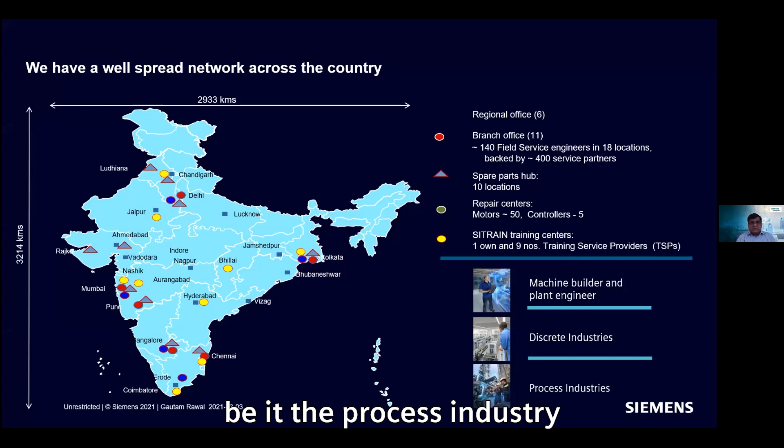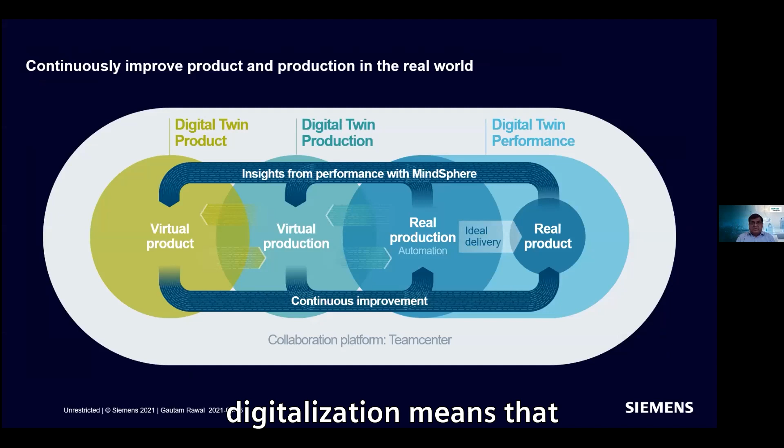Digitalization, what does it mean? Digitalization means that when you are about to set up a plant, you can basically plan in advance in the virtual environment, then execute the same plant in the real environment without elaborate cost of change and change management.

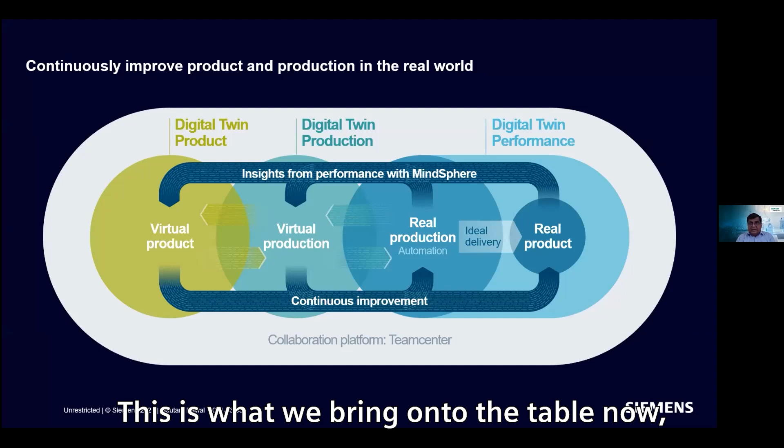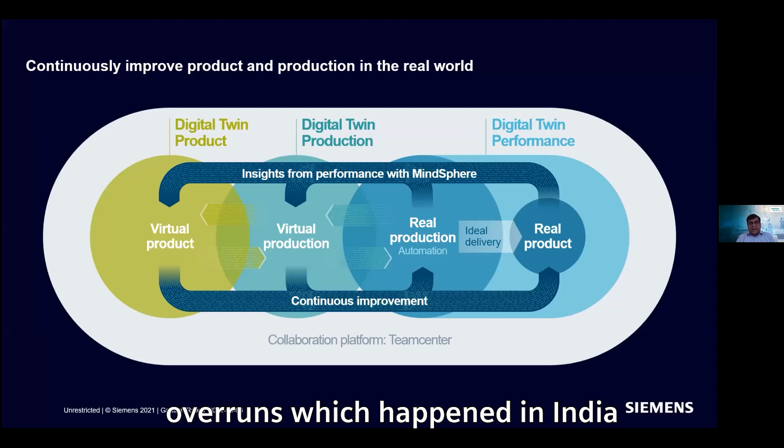This is what we bring onto the table now, and this is also a very important part which will be a game changer for you, because this will bring efficiency to setting up plants. Most of the cost overruns which happen in India happen due to improper planning, and this takes care of the planning.

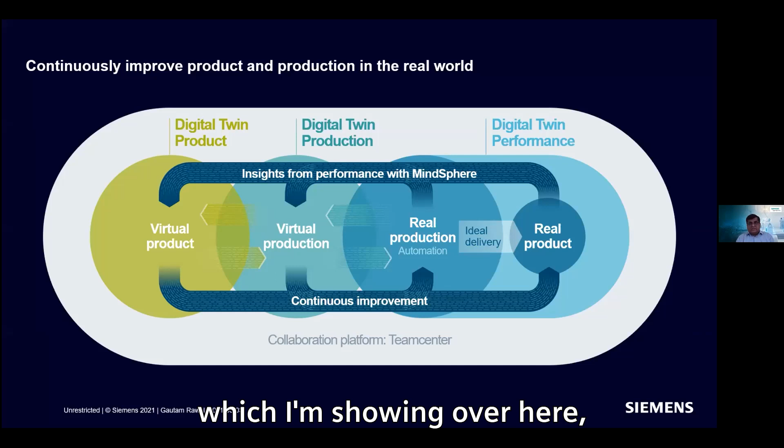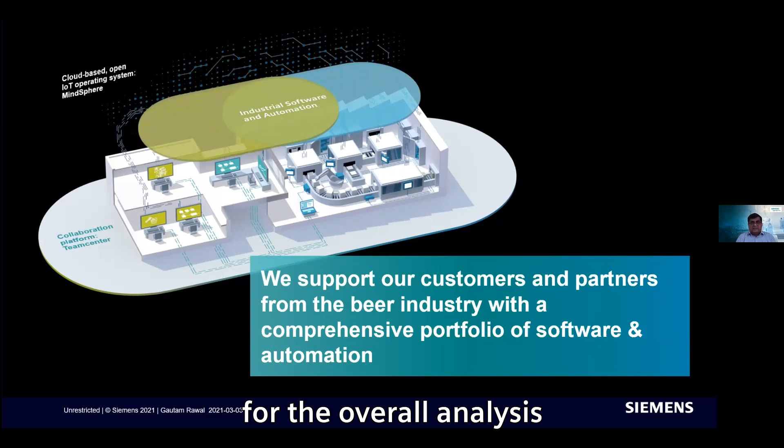Not only that, there is also horizontal digitalization which I'm showing here, but there is also vertical digitalization. That means you can also see the data generated from this plant for overall analysis and further insights into how your plant operation should be, so as to improve the efficiency and productivity of the plant.

Automation makes it possible to repeat processes, to administrate recipes, and to achieve a higher level of transparency and efficiency. And yes, we understand that labor costs have a very different position in the Indian market, but we see it as a global tendency, even in craft brewing, that sustainability in quality and precisely in taste is very relevant to become successful as a brewer.

Because what would you like to achieve? You would like to have a constant customer base drinking your beer. Gautam said that at the beginning of the presentation. Here in Germany, we have many people who have their beer. They can choose, they choose sometimes, but they will always come back to the one they love. And this has to be produced in the same taste, this is what they like and what they like it for.

And automation helps you achieve this sustainability in quality and precise taste, and allows you, on the other hand, to create easy recipes, benefit from experiences in the past, and have recipe control. Particularly in the craft brewing arena, we have a lot of this in a very efficient but repeatable way.

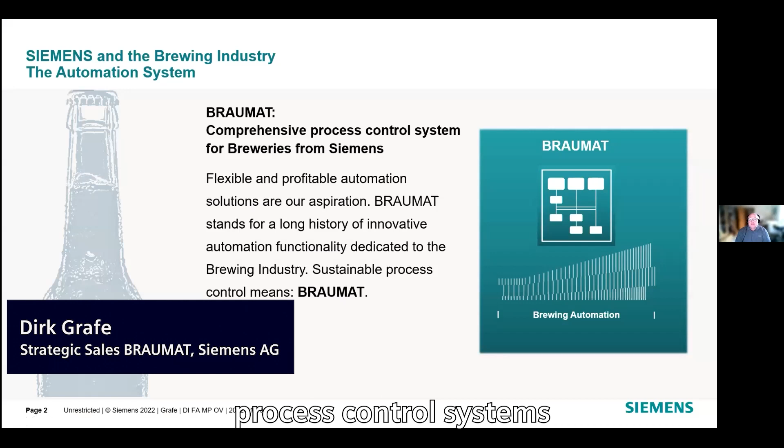I would like to take the opportunity today to introduce an automation system to you, which we have had long in the market, BRAUMAT, as a control system which suits the needs of all brewers from micro, from craft up to mega. BRAUMAT is the comprehensive process control system for brewery from Siemens, and you see it here.

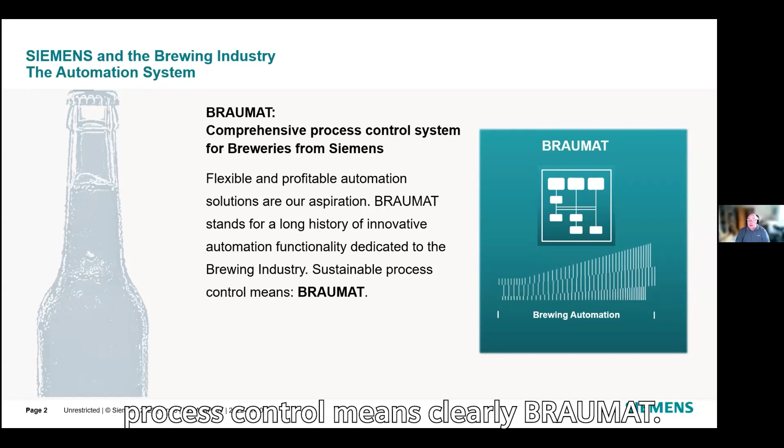Flexible and profitable automation solutions are definitely our aspiration. BRAUMAT stands for a long history of innovative automation functionality dedicated to it, and what is nowadays rather important, sustainability. Sustainability in all means, but even in process control, it clearly means BRAUMAT. Looking back in history, Gottam already explained that we have a very long history with the brewing industry.

We have historical records showing that at the end of the 19th century, we had already equipped breweries with Siemens components. And very early on, nearly 50 years ago, we started to automate breweries based on controllers, on SIMATIC controllers.

In 1977, we launched the first PLC-based and recipe-controlled automation system in the world for breweries, named BRAUMAT. Very reliable, high quality, and an economic positioning that fits the needs of our customers are the key factors that have let us stand long-lasting and successful in the brewing market, so that today we have achieved a network of malt houses, but mainly breweries, around the entire globe which operate BRAUMAT.

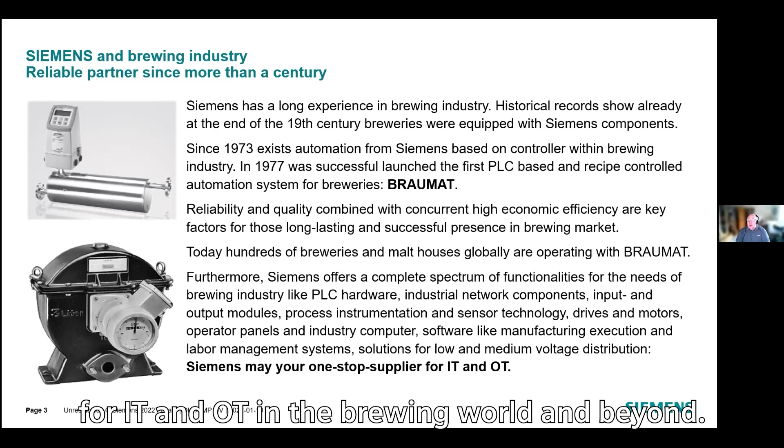But to mention that, BRAUMAT is part of an entire portfolio. For all of those who have not been in direct or intensive contact with us, Siemens offers a complete spectrum of functionalities, components, and systems for all needs. We call it simply where you have a cable, and nowadays, we may shift a bit to be, as Siemens, the one-stop supplier for IT and OT in the brewing world and beyond.

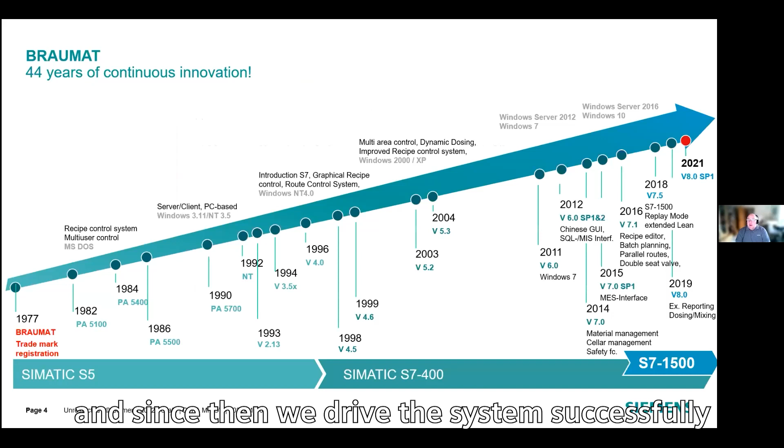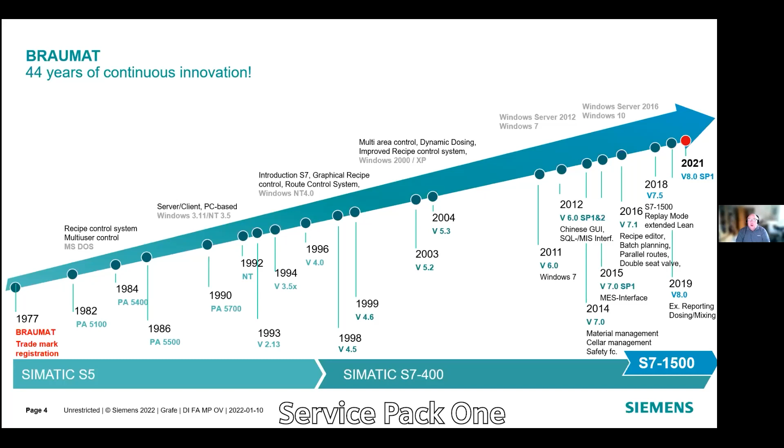Having said that, here's a short glance at the history of the system. On May 31st, 1977, we registered the trademark BRAUMAT, and since then we have driven the system successfully through the brewing market. You see a long chain of innovations, ending up in 2021 with the latest version 8.0 Service Pack 1, which I will now introduce to you in a very rough overview.

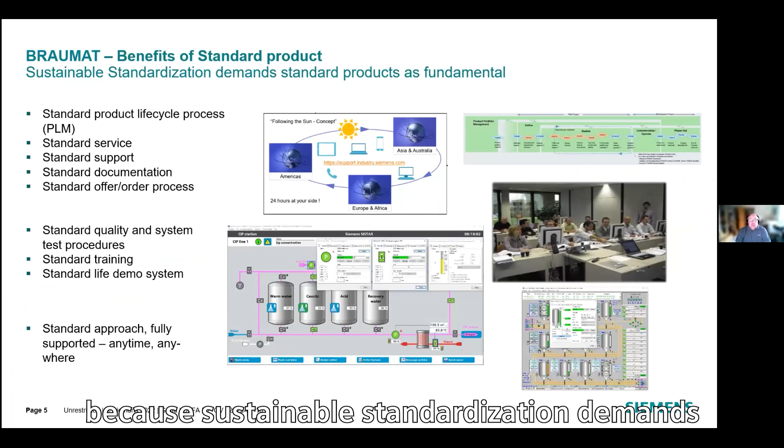Generally speaking, BRAUMAT is a standard product of the Siemens organization, because sustainable standardization demands standard products as fundamental. No doubt, the benefit for any customer in the world is that it is standard wherever you look.

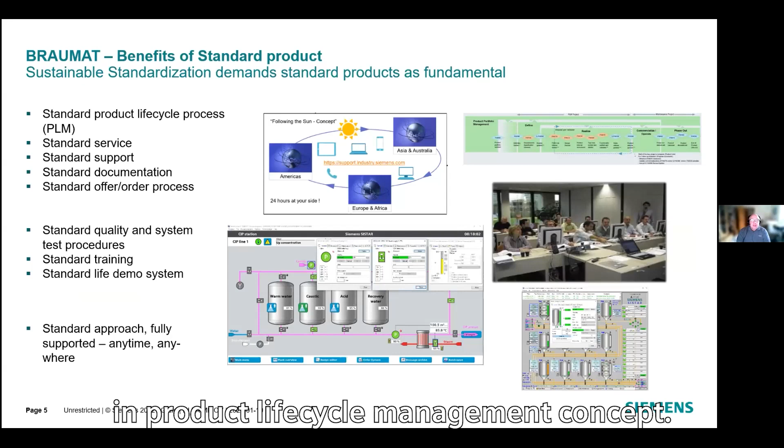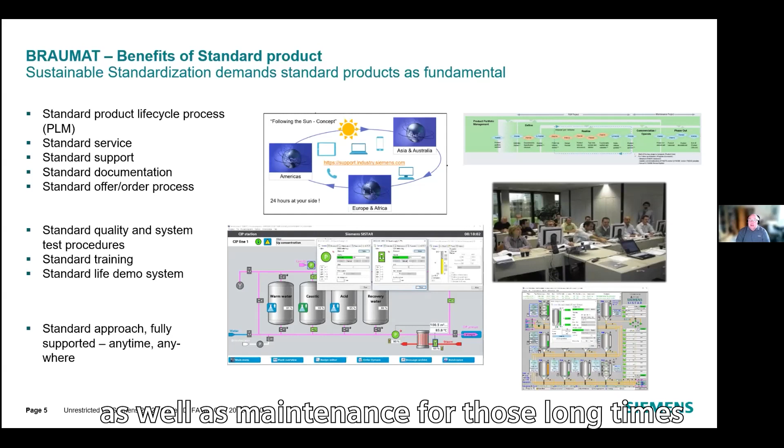The entire product lifecycle process of the system is described in a product lifecycle management concept. Particularly in industries like food and beverage, like brewing, where we discuss software lifetimes in a brewery of 20 years plus, this is rather important, as it gives us the necessary background to supply service, support, and maintenance over that long time under competitive conditions.

You get standard service, standard support, standard documentation, order offering process, quality, system test procedures, training, etc. Everything is standard, meaning we have a standard approach, as you might know from Siemens, fully supported anytime and anywhere.

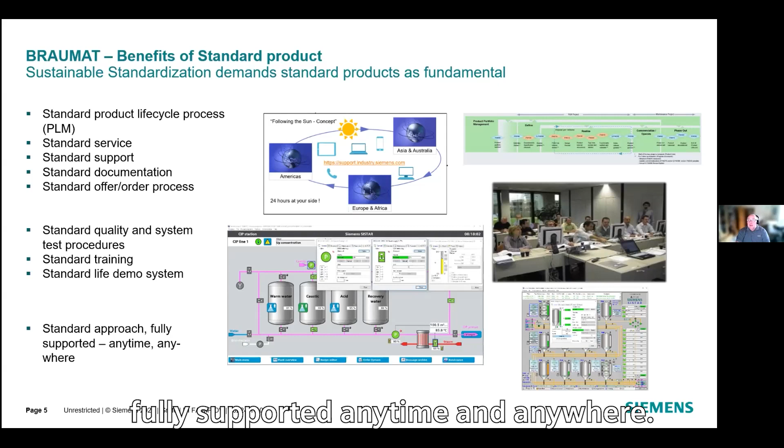Having said that, take a look at the system itself. What could you expect? BRAUMAT is a system dedicated to controlling the processes of brewing and malting.

It consists of an HMI, a human machine interface, meaning process screens which are the virtual display of a real existing installation, giving you the possibility to monitor and control your entire installation intuitively. This process screen, this visualization, is linked to a graphical recipe batch engine, which is the core of the system.

Optionally, for bigger installations, we offer a transfer management module to organize material transfers, particularly in silo or tank farms. And we have a nice feature called process data recording, which I will refer to in a second.

But from an overall perspective, how could a system stay that long, for 40 years, in that fast-running software market, so successful in the market? The key figures, or the key facts, are fairly simple.

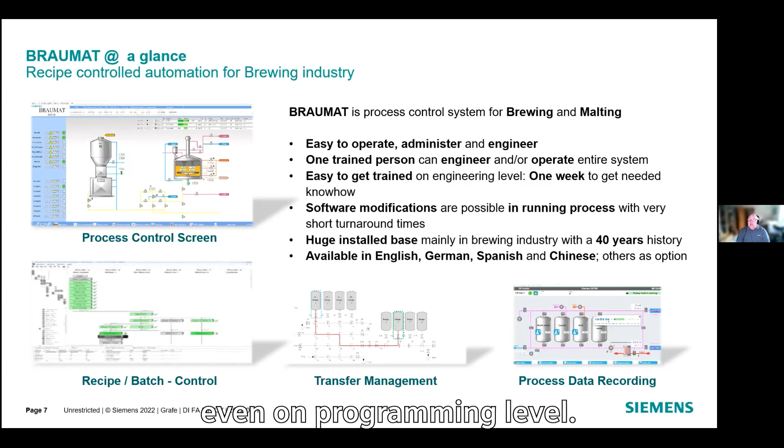Looking a bit deeper into the system, it stays on the Siemens Simatic PLC line and supports the most current family, S7-400, but more importantly, S7-1500, which is the main line of factory automation, released 8 years ago, and I think will stay with us for the next 30 years plus.

On the operator system side, we are compliant with, or stay on, the systems which are currently on stage, meaning Win10 Enterprise Long-Term Servicing Channel 2019, respectively WinServer 2019 in the Standard and Data Center Edition.

And surely, following the trends of today, you can virtualize the system. The released options here are VMware ESX, as well as Microsoft Hyper-V.

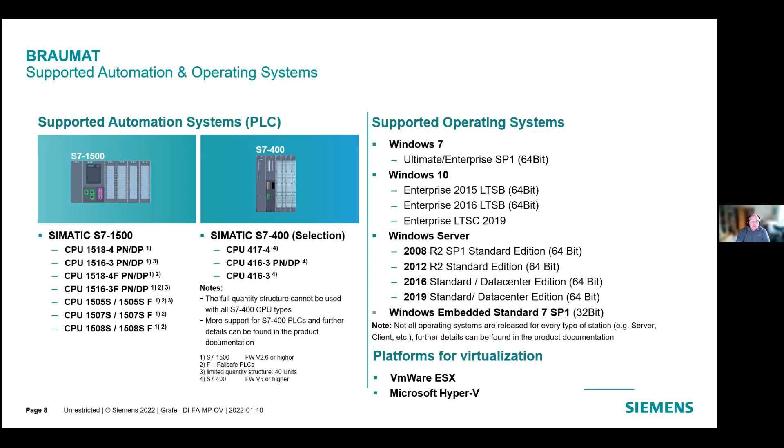Key functionalities of the system, you saw that a little bit, on one hand side the standard process control screen, which, as already said, allows you to intuitively control your process at any time.

The core of the system is the graphical recipe and batch control, giving you a process overview at one glance. It's easy to operate and ISA 88 compliant. Please allow me a few seconds to say more about that.

When you look to the right-hand side, you see the recipe running. The green steps are the steps which have already been successfully executed, and the purple one is the one where you can see underneath all values, all set points, and you have the possibility to interfere here, to change the parts or the values, so that the running recipe can be adapted just in time.

Route control, the third key feature, is a set of efficient automation systems for organizing material transfers, particularly in silo or tank farms. It is quite easy to explain.

It works like the navigation system in your car. You have a source, you have a destination, and the system itself looks for the possible way from source to destination. Is the way passable? Are the valves okay? Are the pipes clean? And does the destination have the right material in it, so that what I would like to transport there fits, or is in the right quality status, meaning clean, separated, etc.

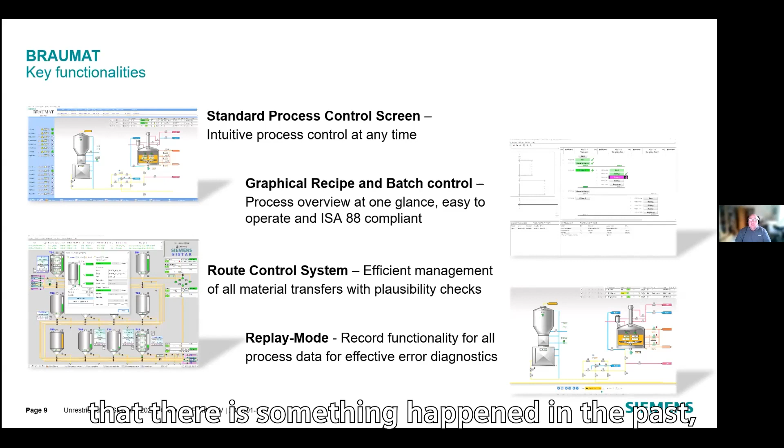Last but not least, the replay mode. The replay mode is a record functionality for all process data, meaning when you realize that something has happened in the past and you would like to understand what happened at that point in history in your installation...

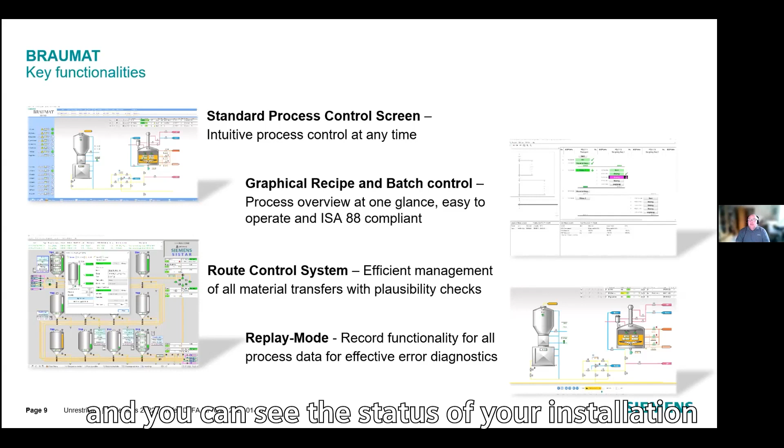Then you can switch from the online to an offline view, starting the so-called replay mode, and you can see the status of your installation at a time ago - 2 days, 3 weeks, 4 months - depending only on how long you stored the data.

The good thing is you can go back in time and see all process screens you had in your installation, no question whether they have been on display at this time in reality or not. You can click on any of the vessels and the related control window will open, just as you can do on the online view to control your operation. Even in this offline historical perspective, you will see the control windows with all the values we had at that time, and you can let it run like a video on a DVD player.

Why did we do this? You can identify mistakes which happened in the past or any extraordinary events, but you can also use it to record the golden batch and train your operators on it.

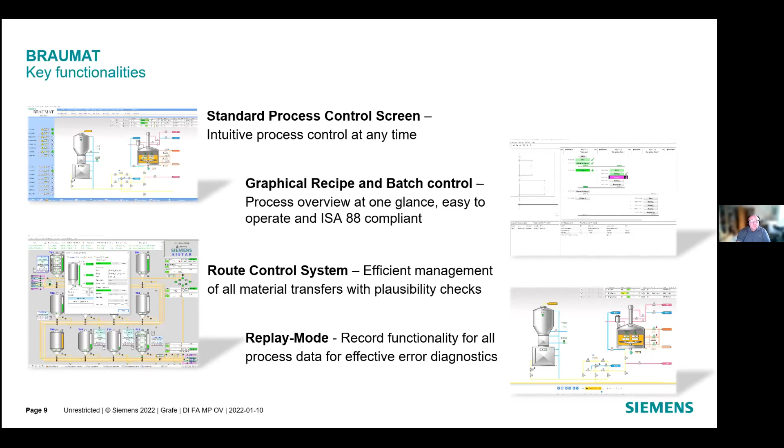Further features and functionalities relevant to mention: the system is seamlessly scalable. You can start fairly small and grow to absolutely large. The smallest brewery I know has a production of 1,000 hectoliters and is fully automated with BRAUMAT in the brew house and fermentation cellar area. The largest brewery I know has a production of more than 20 million hectoliters, driven by a BRAUMAT system with 6 pairs of servers and 47 controllers.

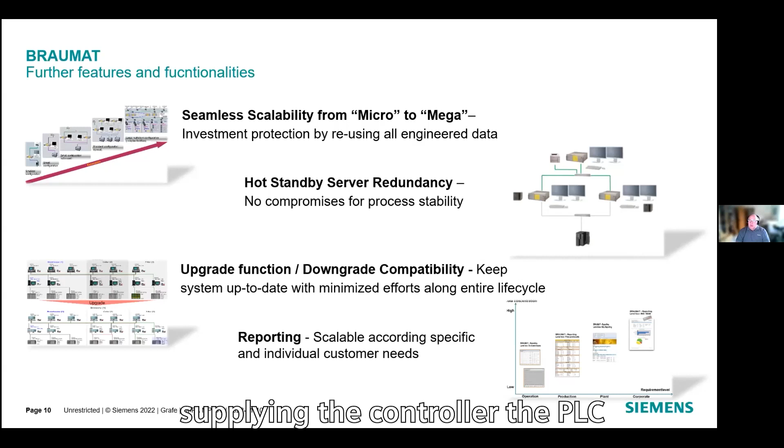All servers in BRAUMAT can run in hot standby redundancy as a granted feature. This means when you operate an industrial brewery, it is mandatory that the process runs at any time. Two servers make sure that if one server breaks, or more importantly nowadays, you need to set up a Microsoft security update, a second server is available, supplying the controller, the PLC, with the necessary batch information so that the process keeps running under all circumstances.

We have an upgrade function built into BRAUMAT so we can execute modernizations within the systems with very limited effort and very limited risk, in an absolute minimum timeline.

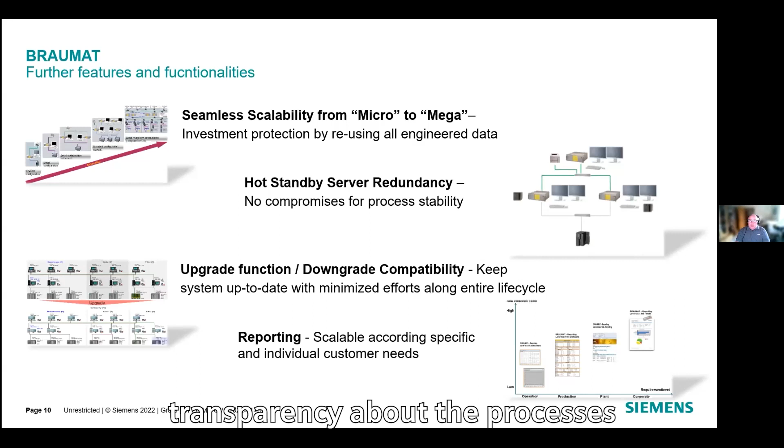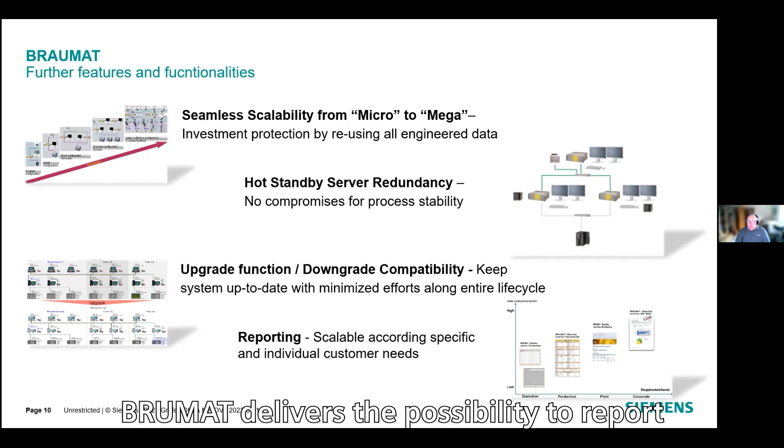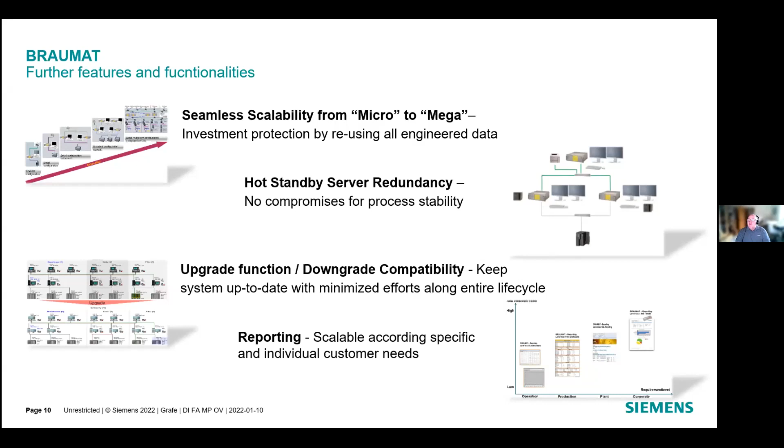Reporting transparency about the processes is more and more important at several stages, coming from your own needs to drive processes more efficiently and effectively, up to the end customer who wants to know more about where his product was produced, under what conditions, where the materials come from, up to the administrations who want even more information. BRAUMAT delivers the possibility to report at several stages to fulfill all needs at every level of requested data.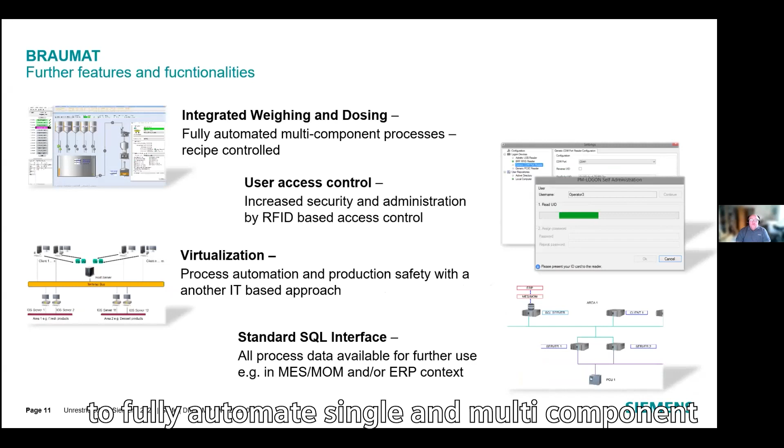We have integrated weighing and dosing automation to fully automate single and multi-component weighing and dosing processes, like it happens in malt dosing.

User access control is granted via RFID card to fulfill the requirement for increased security and administration.

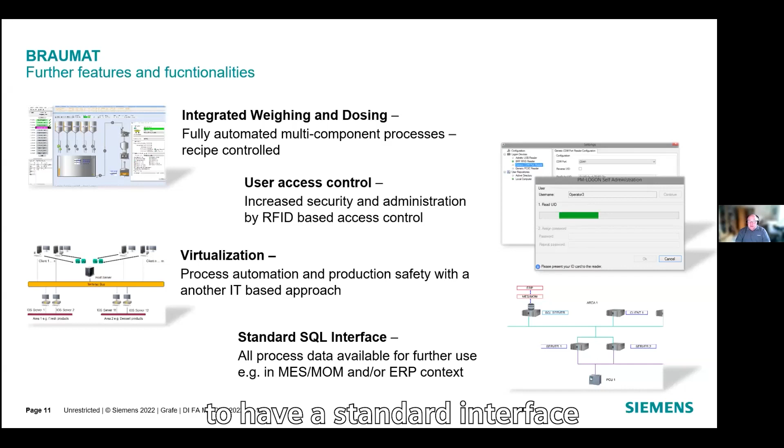About virtualization, we spoke already. The system can be easily virtualized in the granted systems, VMware ESX, as well as Microsoft Hyper-V. And last but not least, we have embedded into the system a standard interface to an SQL database, providing a standard interface towards overlaid layers like MES, manufacturing execution systems, and/or ERP.

The differentiator between a standard supervisory system and a process control system like BRAUMAT is the recipe control engine. What does it do?

Take a look at this, a recipe which I got from the friends at Castle Malting. Here you see the recipe for a Belgian brown beer for home use. On the left-hand side are the necessary ingredients. On the right-hand side, the steps which need to be done. And when you take that, you all will know it, and if you fulfill that, then you can make your beer at home.

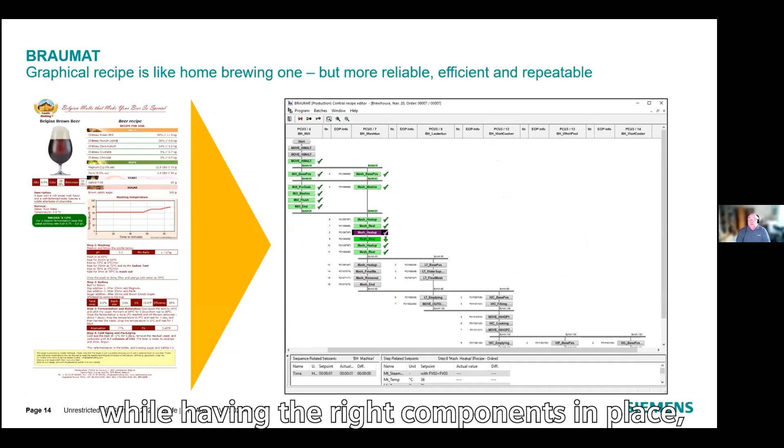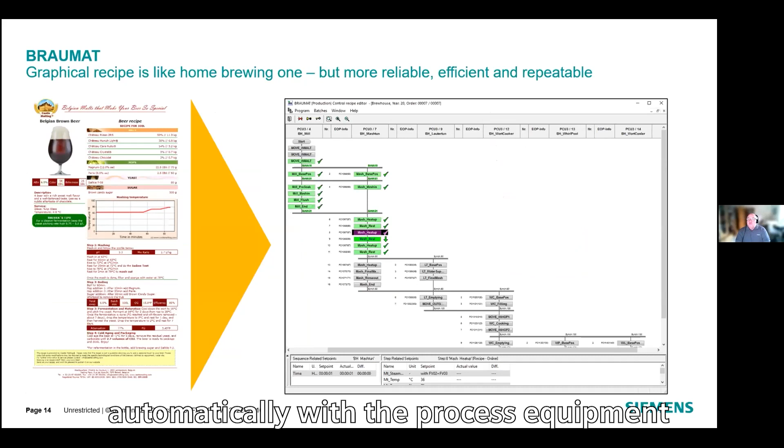The graphical recipe engine of BRAUMAT is nothing else than the description in automation language, with the right components in place, of how to drive such a recipe, which we would do in our kitchen at home by hand, but automatically with the process equipment you have in place.

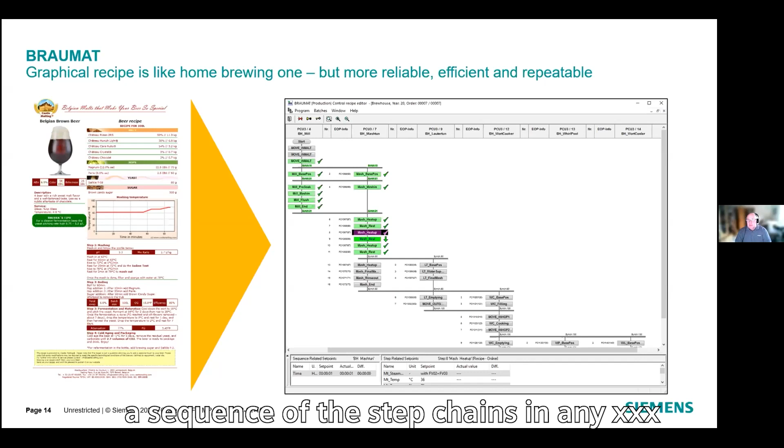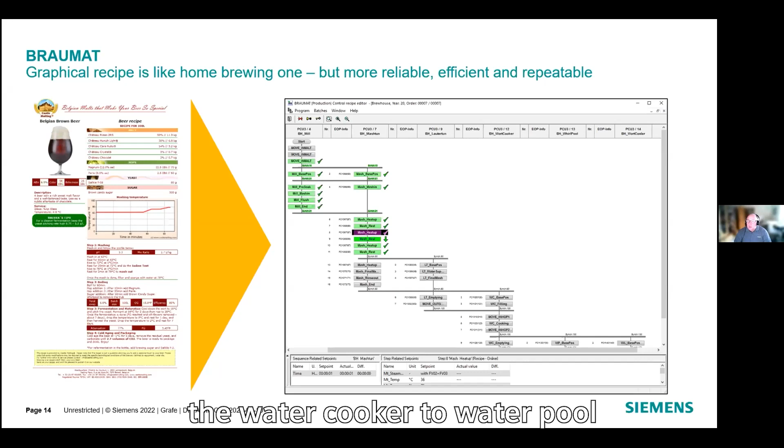The recipe here is a sequence of these step chains in any vessel. When you look at it, you see a typical brew house: it starts with the mill, goes via the mash tun, the lauter tun, the wort cooker, the whirlpool, and the wort cooler, so that we have an entire brewing line displayed.

The benefits of using it are fairly obvious. An automated recipe control can reduce manual work massively, so human resources can be used more effectively, as they can focus on all non-automatable issues and duties. And in the brewery, we have a lot of them. The number of possible mistakes in those cyclically recurring tasks, processes, and routines can be reduced. The machine does not make a mistake. The machine follows the clear given routine.

So we can achieve sustainable and repeatable quality on both the product and the process side. The production process can start without human intervention. This means you can start to mash Monday morning at 2 a.m., and nobody is there. The automation can do that completely independently, so that the processes can run fully automatically and only need to be monitored.

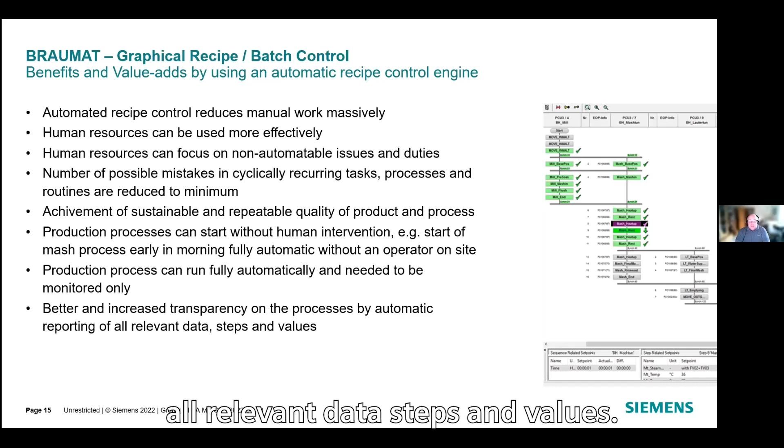And at the end, we spoke about the increased demand for transparency. You get a better and increased overview of the processes through automatic reporting of all relevant data, steps, and values.

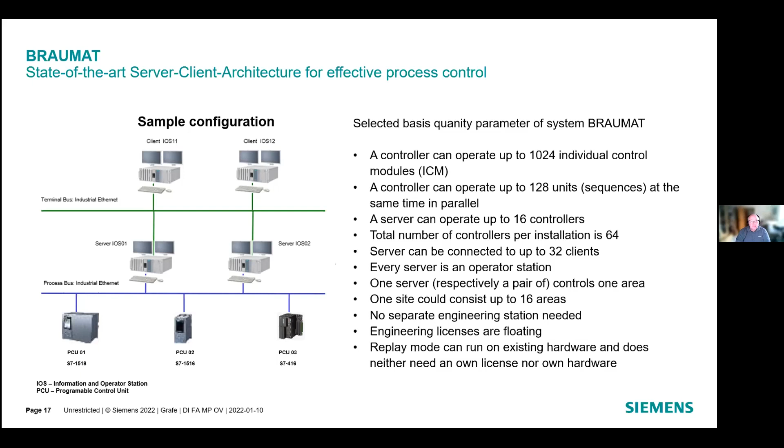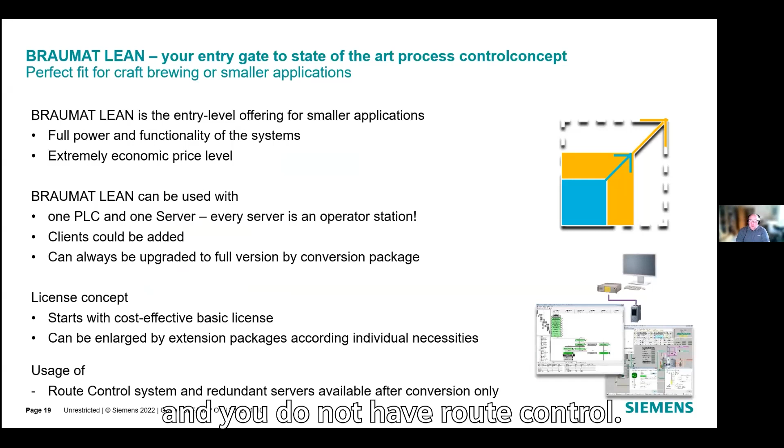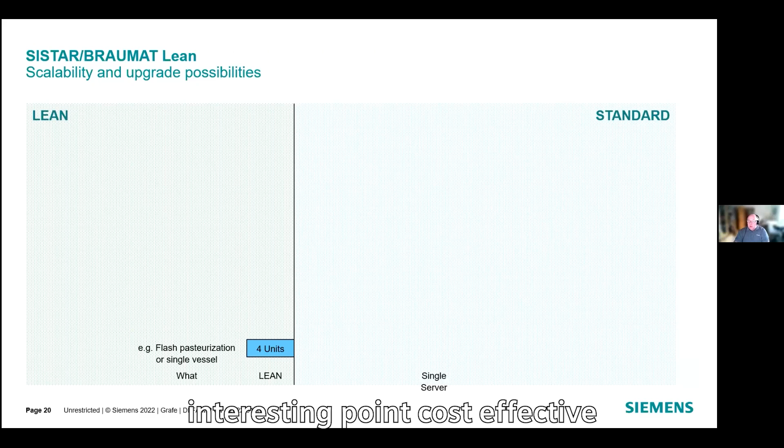Starting point for it could be BRAUMAT Lean. BRAUMAT Lean is the entry gate to a state-of-the-art process control concept, as it is a fully blown version with few limitations. The limitations are you can use one PLC only, one server only, and you do not have route control. The benefit is you can start fairly small and, what is the interesting point, cost effective, with a license which allows you to control 4 units, 4 vessels.

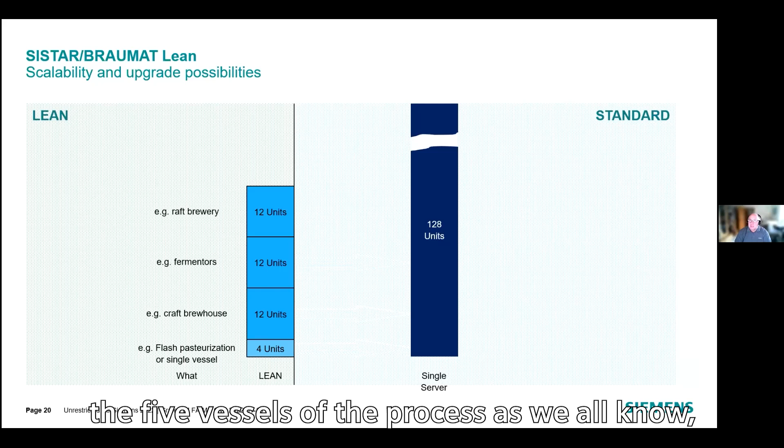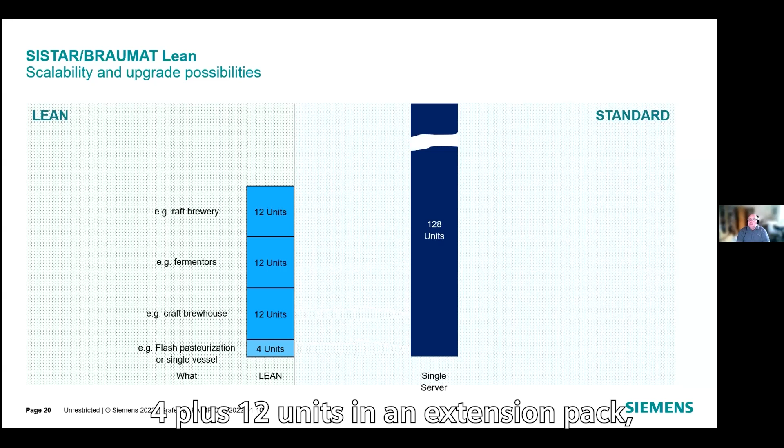You can always upgrade to a fully blown version, but you can stay in the lean concept and you can go up to 40 units. To give you an idea, a brew house usually has 10 to 12 units, the 5 vessels of the process as we all know, plus a little bit extra, so that with the first 2 points, 4 plus 12 units in an extension pack, a single line brew house could be completely automated, leaving enough room with more units to bring the fermenters in.

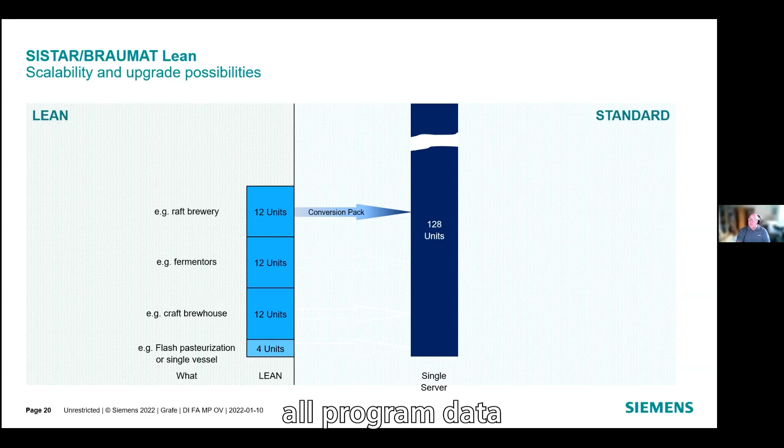And this is what we typically automate in a craft brewery. Once you grow, you can always convert while reusing all engineered, all programmed data, up to a fully blown version. And this could look like this.

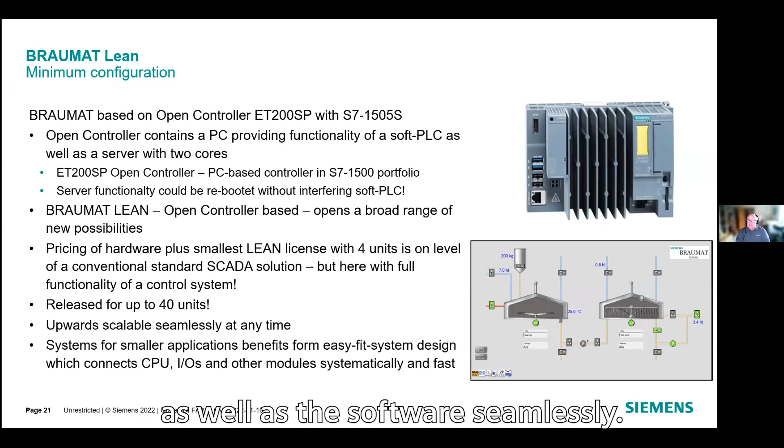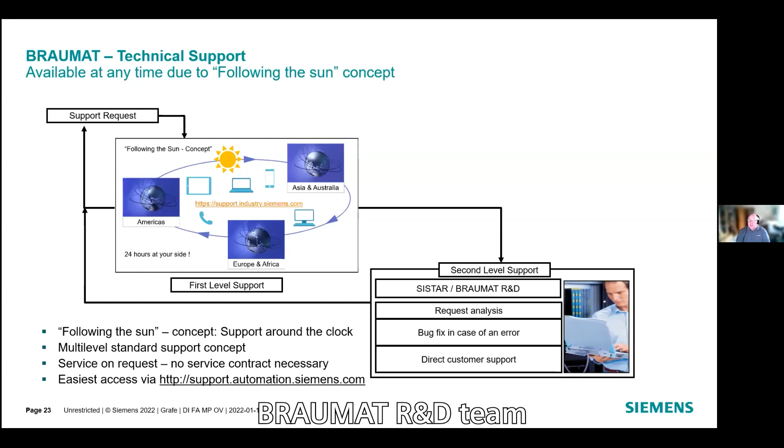Support, we spoke about. We have a standard product. Support is granted via our standard processes. All of you have Siemens components in place. When you have an issue with it, you call the hotline, the standard hotline. This is relevant for BRAUMAT as well. And if the standard hotline cannot support you, they hand over the issue to our second level support, which is directly connected to the BRAUMAT R&D team, and they would help you forward rather fast.

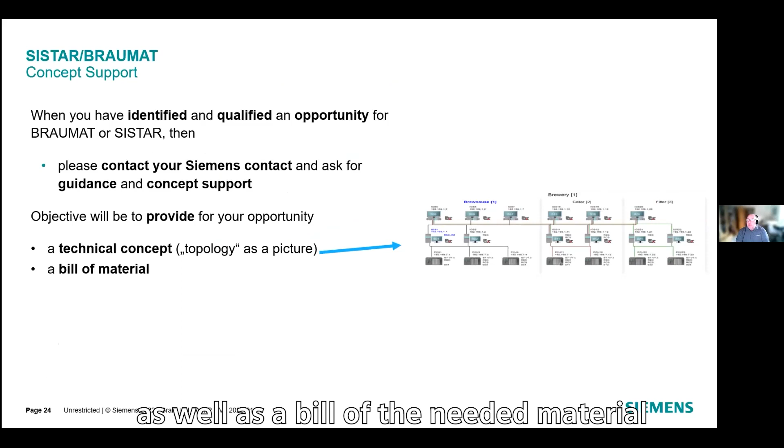When you have the situation where you say, that would be interesting to me, what do I need for an automation of my installation? Then ask your Siemens contact. We will support you in a way that, with the data we exchange, we create on one hand a technical concept, a topology like displayed here, as well as a bill of the needed material and components, to make the order process of the system simple and easy.

I spoke about the training. The training is possible in India as well as in Nuremberg, right now due to the pandemic situation only as a virtual session. It gives you a system overview, explains the features and functionalities of the system, and teaches the basic engineering so that you understand afterward the basic principles. You get the necessary know-how about ISA S88, recipe order, batch management. You will then know in detail what the technological objects are, how to control and monitor, etc.

Using BRAUMAT, why? What is beneficial to you? You have a standard software product supplied by one of the key automation players in that market. After 4 decades, we have a market-proven, mature, and efficient system. We know what to do.

The standard product lifecycle management ensures long-time availability as well as investment protection. We have a global network of local support, service, and engineering capabilities from Siemens, as well as from my colleagues here on the call, plus numerous partners in our partner program. You will have low operational costs due to the intuitive and easy to learn operator interface, and you do not depend on us as a specific solution provider.

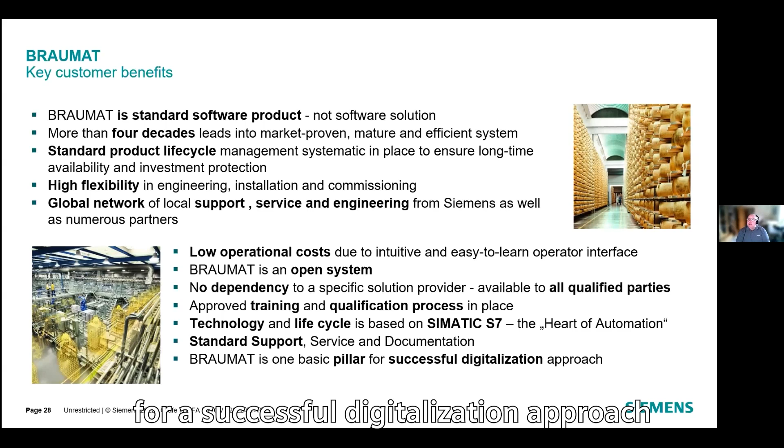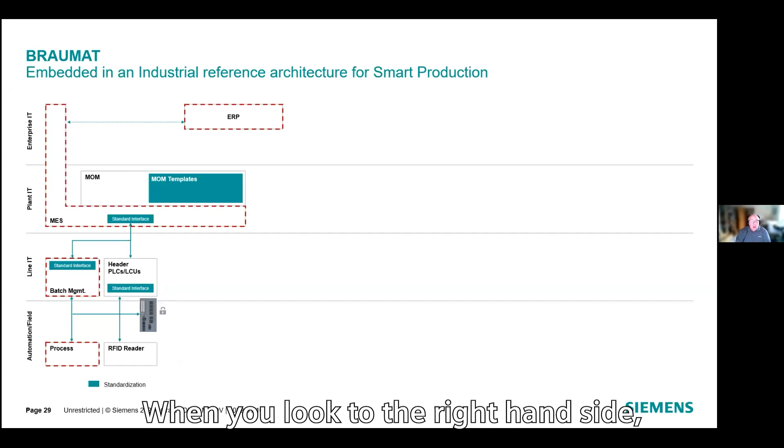Last but not least, BRAUMAT is one of the basic pillars for a successful digitalization approach in your brewery. How can that look? We are on the way right now to embed the system in an industrial reference architecture for smart production. Looking to the right-hand side, the red arrow describes the situation we find more and more in every industrial brewery, in every industrial food and beverage environment.

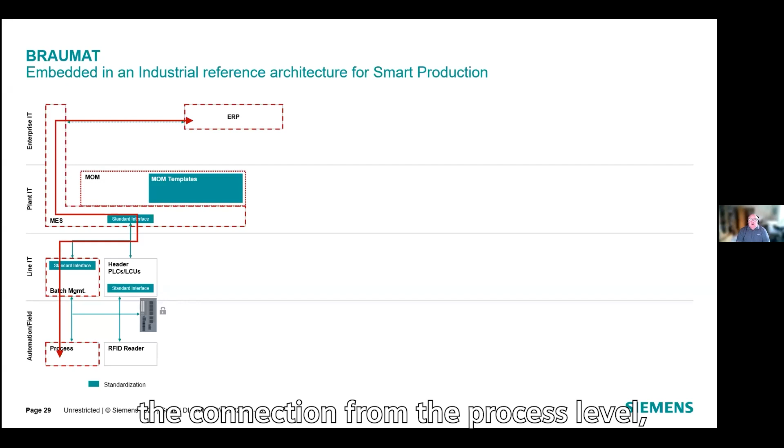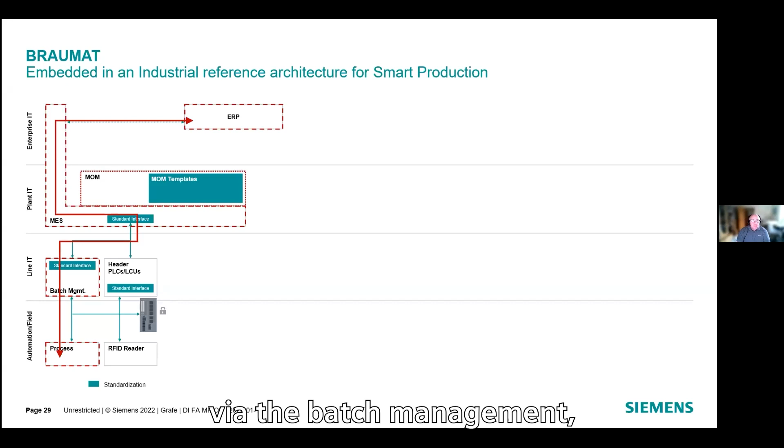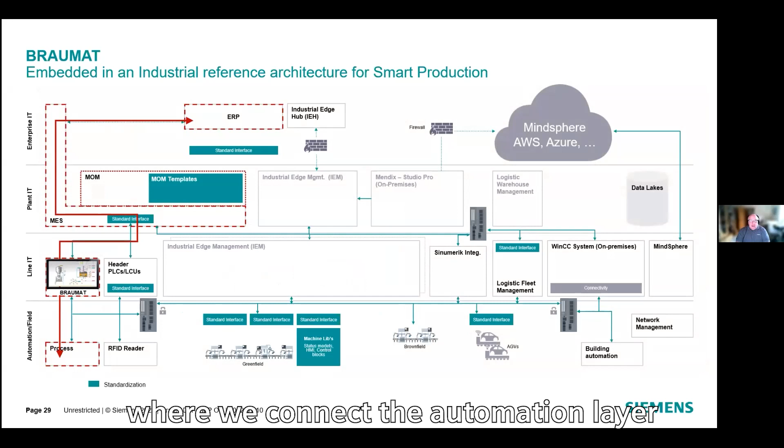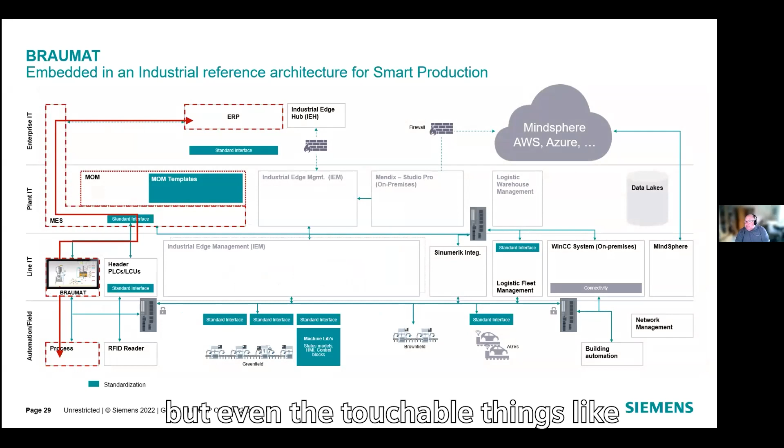The connection from the process level, from the field level where the controller stays, via batch management, the MES level, up to ERP. But at Siemens we think much further. We see this as part of a landscape, a portfolio landscape used as a map for a digitalization journey. By choosing the right starting point, this may be the starting point for a common digitalization journey from you as our customer together with us as your consultant, advisor, your guide through this world, where we connect the automation layer with things like cloud, industrial edge, but even touchable things like on-premise SCADA systems, warehouse logistics, fleet management, building automation, and so on.

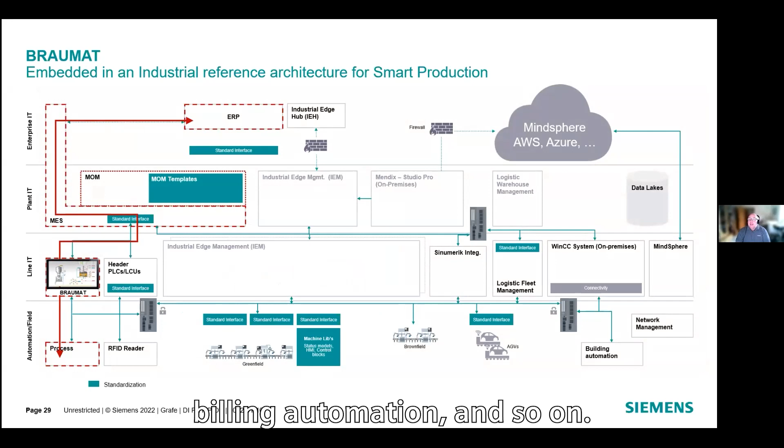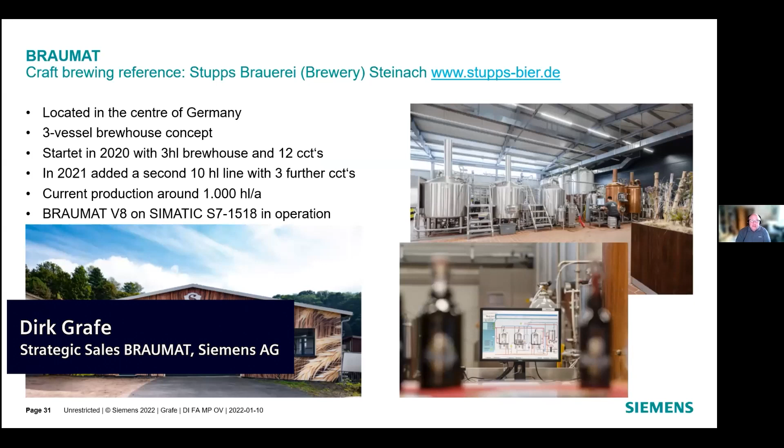We have chosen a craft brewery here in Germany, located in the very center - Stupps Brewery in Steinach. He has realized a three-vessel brewhouse concept, started in 2020 with a 3-hectoliter brewhouse and 12 CCTs. And even due to the pandemic, he was so successful that he added in 2021 a second 10 hectoliter line with 3 further CCTs.

He is producing right now 1,000 hectoliters per annum. The plan for this year, he told me, is 1,500 hectoliters, and it is operated by a BRAUMAT V8 system based on an S7-1518. You see in the headline the URL, go to the site. Unfortunately it's only in German, but that's what you'll see.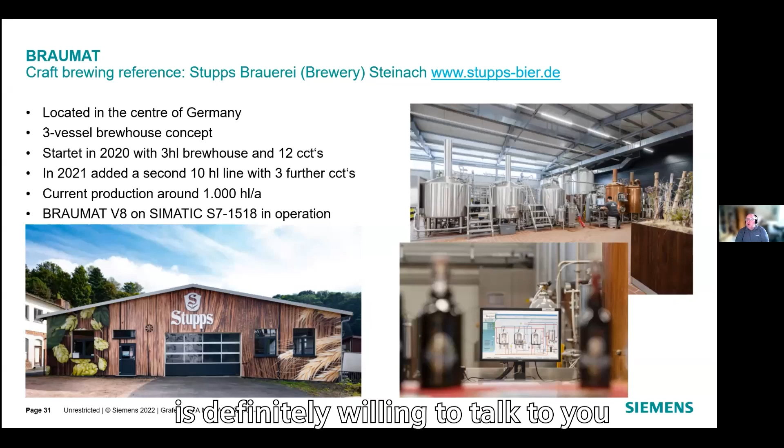Pictures from the production, as well as pictures from the beer, will be granted to you. And Mr. Stupp is definitely willing to talk to you in case you have any questions. He is fluent in English.

In case they are going for a BRAUMAT and there are any ancillary equipments which they are trying to buy, we can always work with them. We can always work with their OEMs and check for Siemens technology and financing options together.